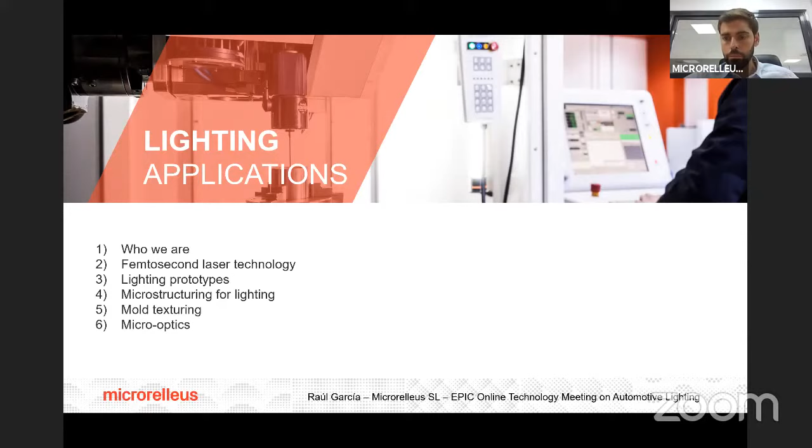I will speak just 1 minute about who we are and the femtosecond laser technology, then about lighting prototypes and mold microstructuring and texturing. That's our company, that's who we are. We are a service provider for industry. What we do is laser micromilling, microstructuring, laser texturing, and industrial engraving. The company was created in 1983. We have several different services and technologies. Our facilities are in Barcelona, and in 2016 we were pioneers offering femtosecond laser service in 5 axes.

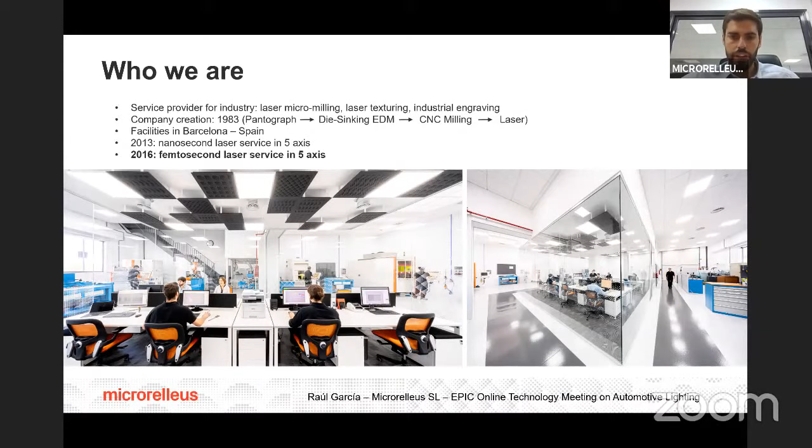So what is a femtosecond laser? A femtosecond laser is an ultra-short pulse duration laser, so the pulses of the laser are very, very short. In terms of the industry, which benefits and advantages do we have because of this short pulse? On one hand, we can engrave over any material - PMMA, PC, glass, steel, aluminum, whatever - and we can do it absolutely burr-free with good superficial quality.

If we compare this technology against conventional technologies like milling machine, die-sinking EDM, and so on, we can achieve smaller details than ever before. And if we compare it with nanotechnology processes, we can do it in an absolutely industrial way - big parts, quite big inserts with weight and so on, 3D shape as well.

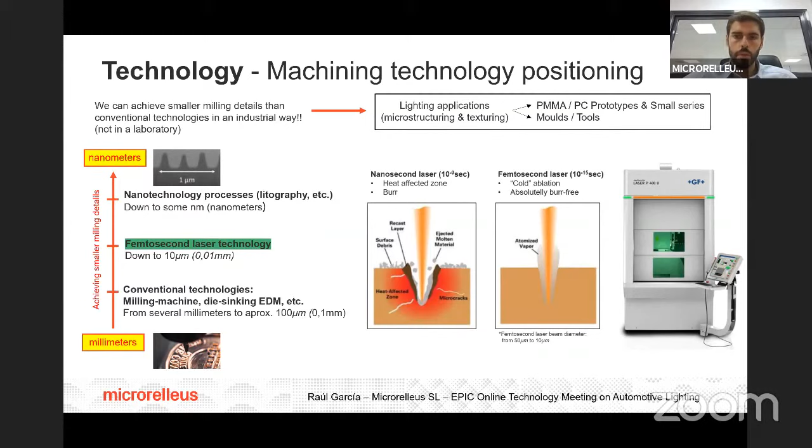So for lighting applications, what we do with the femtosecond laser - we work on PMMA or PC prototypes, also small series, and mold and tool. Beginning with prototypes, we can see in this image the blinker of the mirror of the new Seat Leon that was presented a few weeks ago. In this case, we created this microstructure for design purposes in the PMMA prototype at the beginning and then later in the mold.

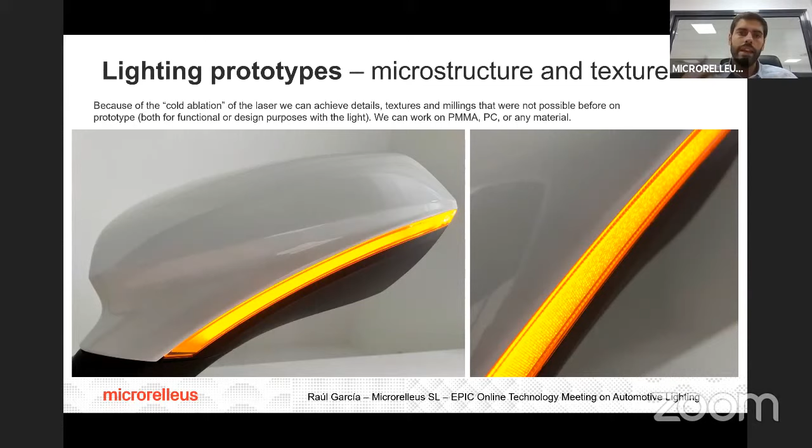We can see here the difference between the plastic injected part in the mold against the previous micro-milled part using the femtosecond laser over PMMA, and we can see that the microstructure is the same - the original prototype and the final mold.

We don't use femtosecond just for design purposes, but we can also imitate in prototypes the graining that is so important in automotive lighting, like K29, K31, the VDI scale, etc. In this image we can see that in Microrelleus we developed the imitation of those standard grainings in the PMMA prototype, showing the difference between VDI engraved on mold, the injected part, against VDI directly engraved over PMMA.

Usually customers send us the PMMA block already milled and polished, and we work over it for different parts of the car.

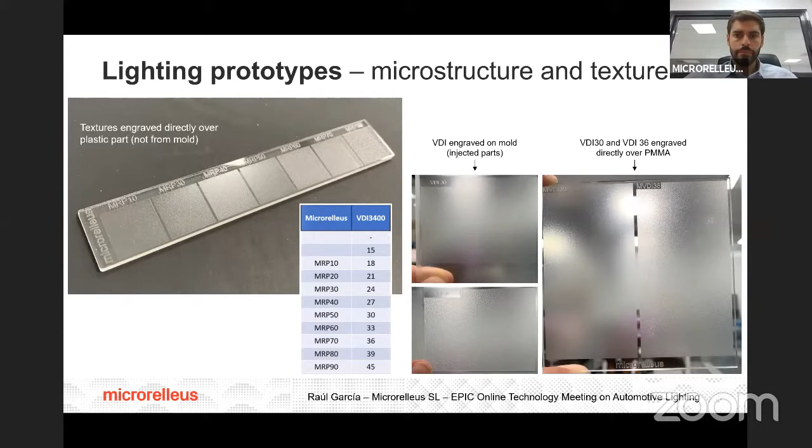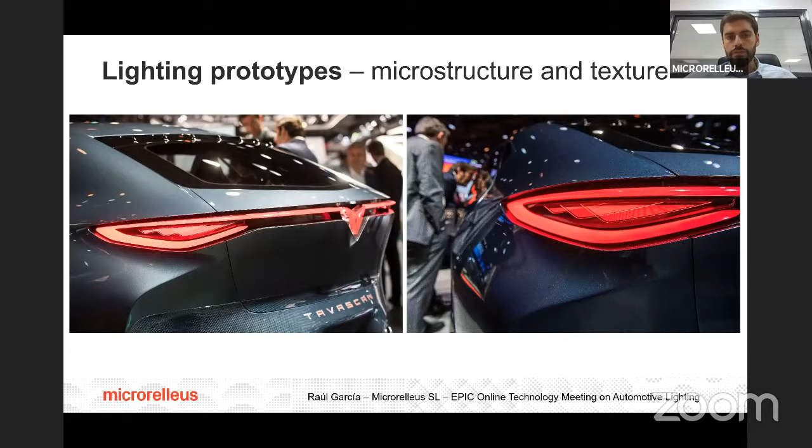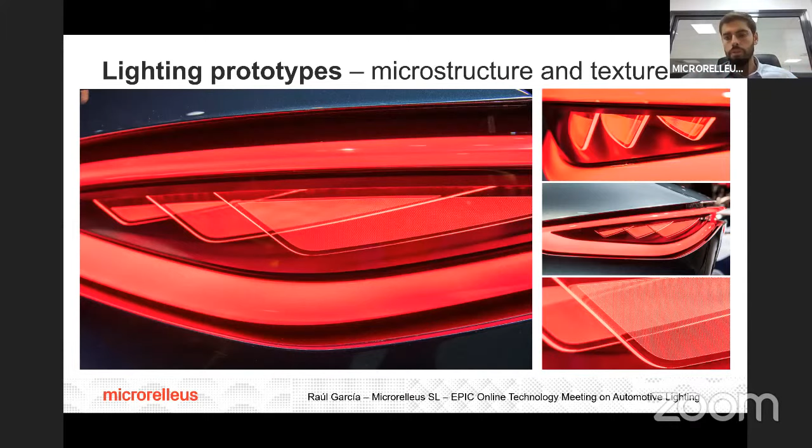To finish with prototypes, we engraved in this Cupra Tavascan prototype the microstructuring of three parts of the tail lamp. Those are microstructures for light curtains. LEDs are placed on top, and thanks to this microstructuring we can see the texture clearly, and the light is absolutely homogeneous on all sides.

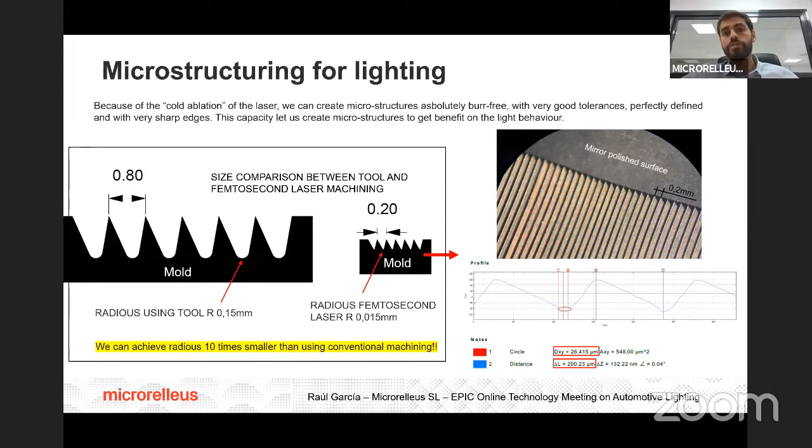If we speak now about mold and inserts, as we said before, we can achieve details much smaller than using conventional technologies. So for optical designers and engineers, there is no limitation anymore like the typical radius limitation of 0.15, 0.2, etc.

We can achieve a radius 10 times smaller than using conventional machining. We can see the example in an insert on the right-hand side, and the same example placed in a 3D insert.

So who creates these microstructurings for different purposes, like opening light, increasing light intensity, or changing light direction? Usually it's our customers, the OEMs, tier 1, tier 2, who send us the design of the microstructuring, but sometimes they ask us to be proactive in terms of design.

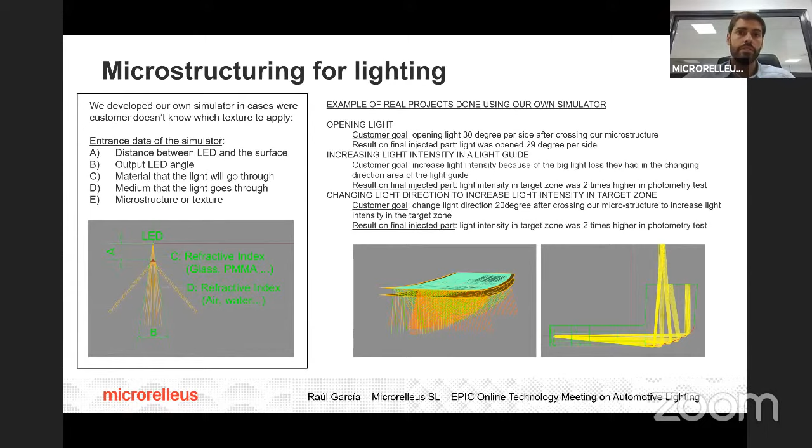We have our own simulator, our own ray tracer that we created ourselves with an algorithm generator, so we can also give this service, with some limitations, but we can offer it as well.

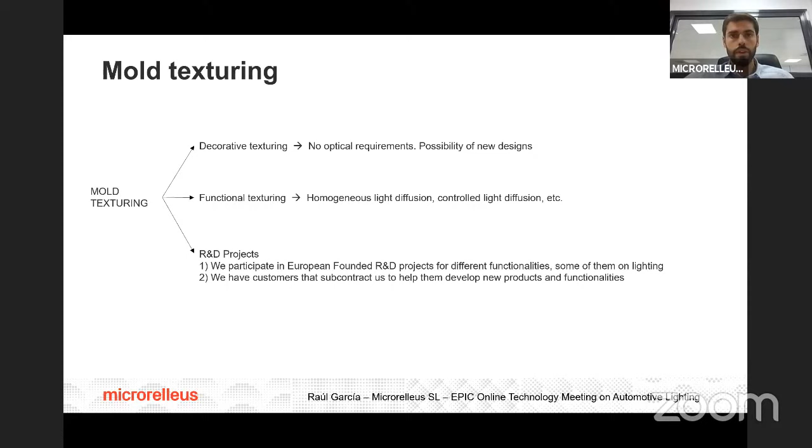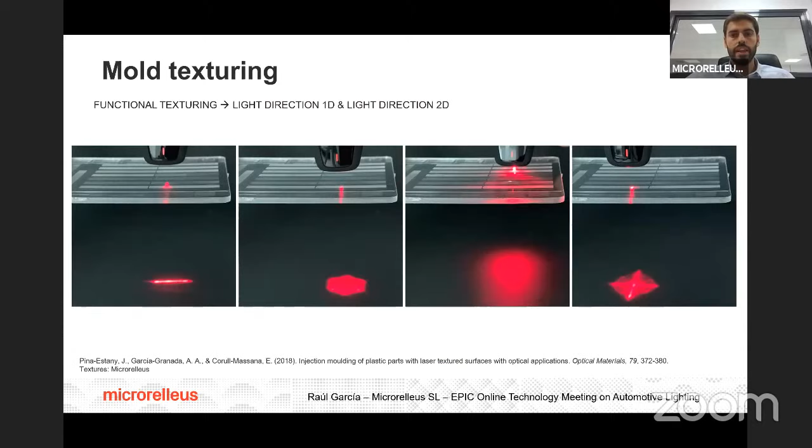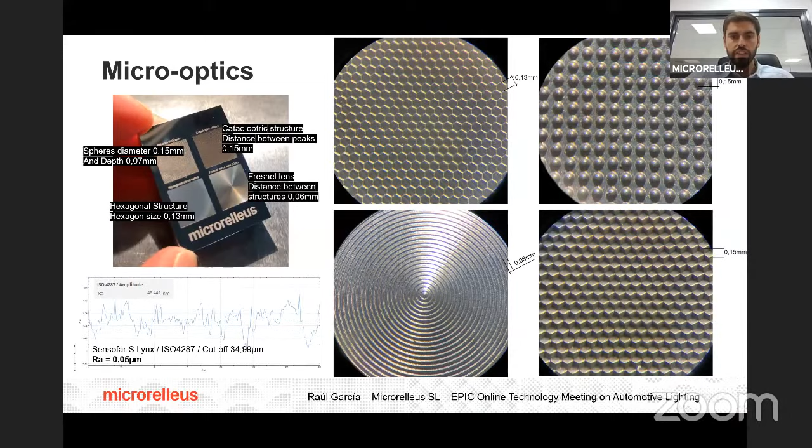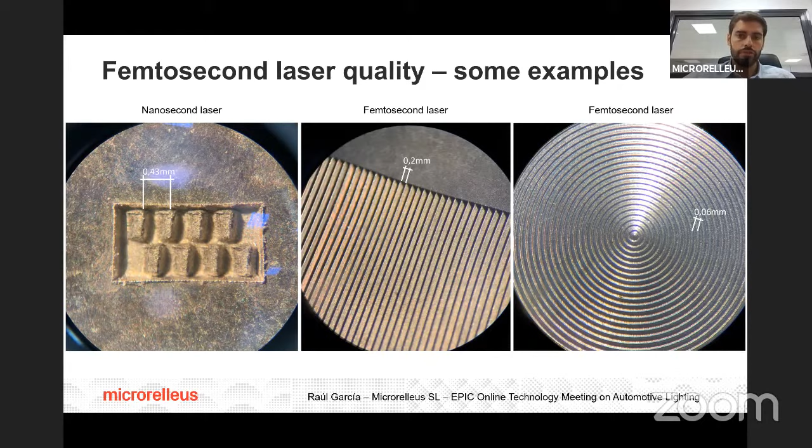In terms of MicroOptics, we achieve the highest quality and smallest details, as shown in this comparison against nanosecond laser. We can see much smaller structures without any burr, very good definition and surface quality compared to it, and the shape is also very well defined with much smaller radius compared to this nanosecond laser, which is the standard in the market that most companies use.

To finish, we offer services of laser microstructuring, texturing, and industrial engraving over final parts or single parts of serial production in PMMA or PC, applied also over mold and tool. We also offer R&D, and many customers pay us for R&D as well.

And our customers, who are they? They are OEMs, tier 1, tier 2, final product manufacturers, mold makers, etc.

So that was everything. I did my best to fit it into these 6 minutes. If you have any questions, please feel free to ask whatever you want.

Thank you very much, Raúl. I always like to start with Raúl because he always keeps the presentation on time, and it always feels very lively because your work is frankly exceptional.

But you are already quite an expert in these meetings, so you know what they are about: collaborations. If you could get the perfect collaboration out of this meeting, what would it be? What is the perfect question you would like to get from the car makers in the room today?

Well, finally, what we are looking for are OEMs or tier 1, tier 2 companies that, looking at our presentation, can sometimes open their eyes a bit and put their technology in our hands, so they can know about new possibilities and new developments and designs, able to apply to their previous developments or new ones.

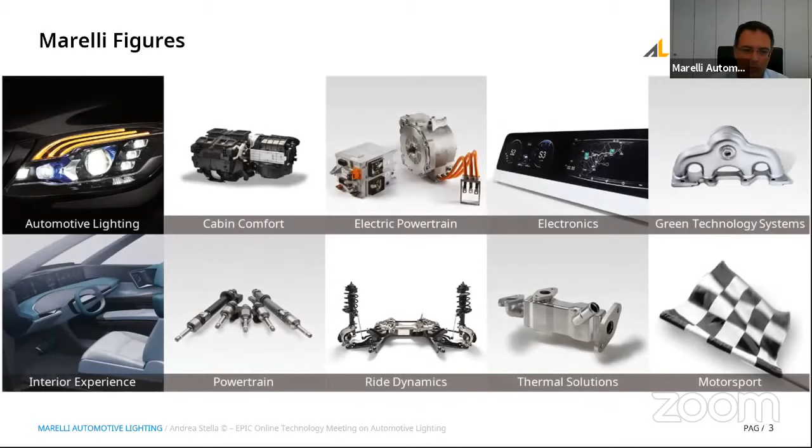This is our portfolio of products, of which automotive lighting is one of the biggest business lines. We are a truly global company with a footprint covering all the continents. Marelli, the whole group, has 13.4 billion euros of turnover, 170 locations worldwide, and over 60,000 employees.

Marelli Automotive Lighting takes the second position in terms of rear lighting supplier and third position in terms of front lighting supplier in the whole automotive exterior market, with 3.6 billion euros turnover, 31 locations, and more than 20,000 employees, of which about 2,000 are in the R&D group in my team.

Our product portfolio is pretty wide. We go from headlamps, rear lamps, lighting electronics, and also sensors. In the headlamp area, we cover the full spread of technologies, from halogen to our latest and greatest digital light, which we'll speak about shortly, with more than 1 million pixels to shape our light distribution and generate communication through projection on the road.

Together with laser and traditional LED -- we say traditional because LED, for the last 12 years, is standard technology for exterior lighting. In the rear lamp area, we also cover the full spread of technology, from full LED rear lamps to OLED rear lamps. Here in the rear, the keyword is homogeneity, style, and design, together with function of course, but it plays a much bigger role in the styling of the vehicle.

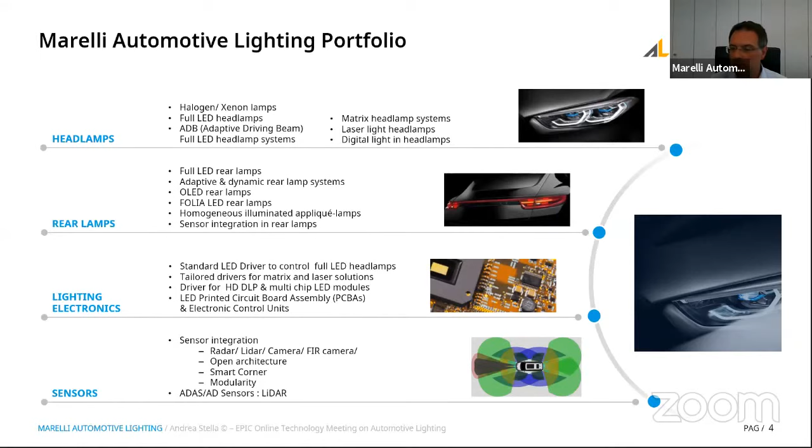And last but not least, we are also active in the sensor area for driving assistance and autonomous driving, where we have a joint development agreement with the company XenomatiX in the LiDAR area.

What is important for me to convey today is that all these innovations in the automotive lighting field are not possible with the set maker standalone. They need a strong partnership in both directions: first with our customers, because our devices are more and more connected with the rest of the system and need strong collaboration and co-development with them, but also with many of our tier 2 suppliers, because technologies like LEDs at the beginning of the 2000s, and laser, and then digital light processing, are only possible for us if we have the right partners in the tier 2 area.

So here we have some examples of what our history has seen, and it is part of our history being the first in the market with the most innovative technologies. We go from 2008 with the first full LED headlamp in partnership with Audi and Philips Lumileds.

We like to say we were the first. There's another one who also claims to be first. But with Audi and OSRAM, we claim to be the first in converting laser light into front lighting, and we were definitely first in 2018 with the first micro mirror headlamp with 1.3 million pixels in the Maybach S-Class, immediately followed by the Audi e-tron, where similar technology is also applied.

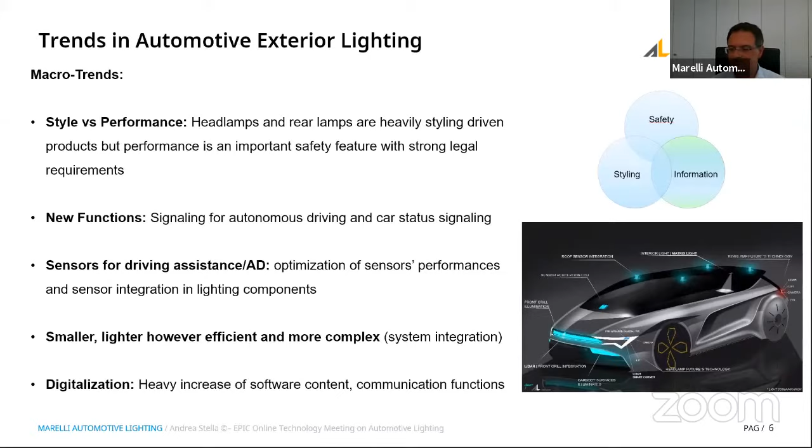Yeah. Go ahead, Anka.

Please unmute. Sorry, yes, I have a question about the digitalization, because you mentioned some digital light in the headlamps. Do you mean that you put the intelligence inside the headlamps, or do you have some intelligence in other places in the car, or outside the car? How do you deal with the intelligence in the car?

The intelligence is distributed, and it also depends on the car maker's platform strategy for the vehicle. But definitely the headlamp itself cannot fulfill all the functions. It needs information coming from other sensors, navigation systems, or body control units needed to generate the light distribution on the road. So depending on the car architecture and system strategy, we have developed systems where we have heavy content of intelligence in terms of real-time rendering for light distributions in the headlamps. We've done this, but in other applications with similar technologies, we have just received pre-processed information from the vehicle architecture. So this is very car-architecture-dependent, because these systems are much more deeply integrated with the whole vehicle system.

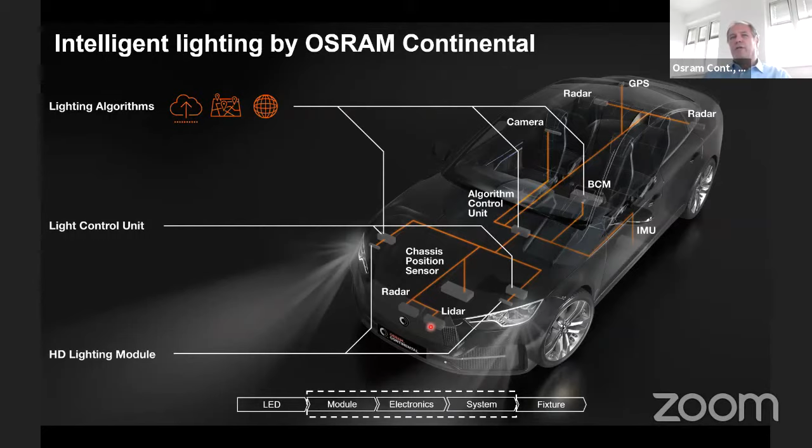Our customers are typically car makers and headlamp and rear lamp manufacturers. And that we do specifically for certain application areas, for front lighting, but as well for projection around the car, and also interior lighting.

Now to speak a little bit about technology: in front lighting, of course, besides more state-of-the-art materials and technologies we use to generate high beam, low beam lighting, or lower resolution driving beams, we are in particular interested and use two major technologies which are able to generate high resolution lighting. By that, being able to mask oncoming or preceding traffic, and even generating lines, patterns, or symbols, as was already shown by Andrea in the presentation before.

These two basic technologies are, on one side, digital mirror devices, which are lit by LEDs, and these are able to make light distributions of about up to 1 million pixels, and that's also the resolution. And as well, we use active matrix micromatrix LEDs, which light by themselves and do pixel resolutions up to several 10,000s. These two technologies are somehow competing, but also able to be used for different use cases. This is something we are really working on and are interested in further progress.

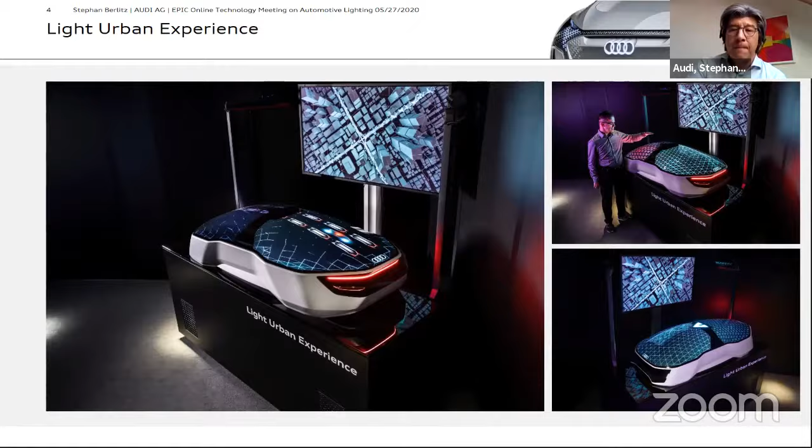Thank you. Thank you so much, Stephan, for this futuristic car. It looks like a dream car, super beautiful.

So you know how it goes with EPIC - you tell us what you can do, and you leave room to hear what the others can do for you. What kind of collaborations are you looking for? What kind of partners are you looking for?

Actually, it's altogether - the first thing is of course to show everybody what could be the future direction. That's one point, that's the main reason why I'm here. And of course I need a lot of partners, because this is a complete system.

You need electronics, you need lighting, you need even some old-fashioned characteristical hardware like windows. So it's not just lighting or electronics, you also need a new production of glass, for example. And it's about seeing who is working in this field, what different ideas we could get, and working together to see what could be the first steps to get micro LEDs, micro optics, new electronics, flexible electronics, and all of these things.

It's something that we will need, and also of course the electronic control units for all of this, because it's a difference if you turn on one LED, five LEDs, or a few thousand, or even maybe one day a few million LEDs.

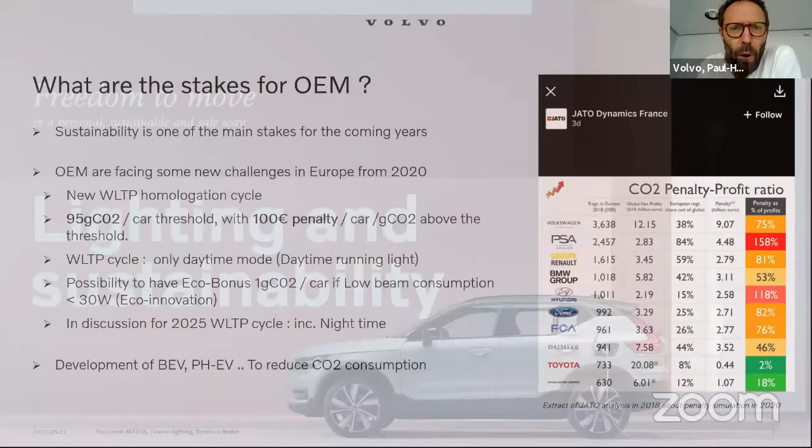So I will speak about lighting, and especially I will focus on sustainability, because I think we have to reduce pollution. I could speak about plastic and so on, but I will try to focus on consumption, because consumption for European car makers is a key issue, especially this year, because we have a new regulation in Europe.

Perhaps you are not aware of it, but you will see what I put in the presentation. We have a new regulation and a new homologation cycle for all the car makers. In this new homologation cycle, we have to respect a threshold, and this threshold was defined as 95 grams CO2 per car.

If we are above this threshold, we will have to pay a penalty of 100 euros per car and per gram CO2. On the right, I put a schematic - an analysis from JATO company in 2018 about the penalty that car makers might pay in 2020. You can see that it can be a huge penalty.

Due to that, the car makers try to do something, and especially they will develop electrical vehicles or hybrid electrical vehicles to reduce power consumption and then be able to respect this threshold.

But when we see this cycle, what is the relation with lighting? In this homologation cycle, the lighting is on, especially the daytime running light. The daytime running light is what we use to do the signature of the car with our beautiful signature. Also, because it's only homologation in daytime, car makers can have a bonus, what we call an eco-innovation, if the low beam consumption is below 30 watts, something like this.

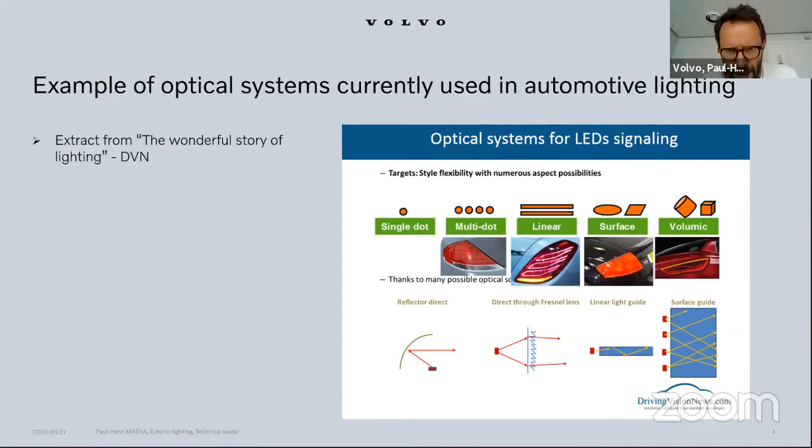If we see what we use for optical concept, I put a slide from Driving Vision News where you see the optical concepts we use in the automotive industry. You can see that it is a very old technical concept - we have reflector design, light guide design, and so on - and this efficiency is quite low.

If you remember the previous slide, the threshold is 95 grams CO2, that is to say lighting is around 1% of the total consumption of the car in the homologation cycle. So it is important. Also, if you compare to battery, you could say I have battery, I don't care about power consumption - but no, you take care also, because if you have a battery with a hybrid vehicle, it will be 0.5% of the autonomy of the battery, for example.

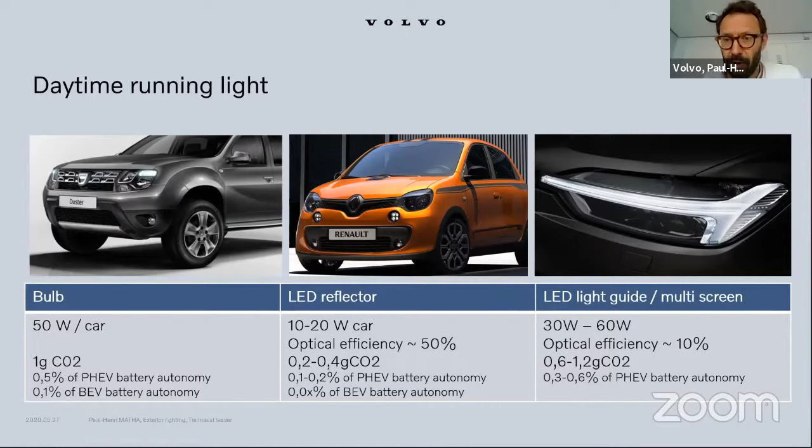What we call light guide or edge light technology. In this solution, the power consumption is quite important, and sometimes it is more important than bulb. So even if we have LEDs, we have power consumption bigger than bulb, and it is very important for the consumption of the total car and the autonomy of the battery.

If I continue, I put an example on the low beam. Low beam is when you drive by night, you switch on the low beam. So if you see what we had with bulb in the past, it was 150 watts per car. That is to say it is 3 grams CO2, and it could be, if you have a hybrid car, 1.5% of the autonomy of the battery.

If you use an LED solution, you have different optical concepts and different performance. I put a medium car like Renault Captur, for example, or it could be Volkswagen Polo. You can see that the optical system is an LED reflector. In this case, optical efficiency is quite good, 50% we can say, and the power consumption will be good.

But if you begin to reduce the size of the function and you want to have also very good lighting performance, in this case the power consumption will increase a lot. So you can see a Volvo solution, for example, where the height of the function is between 20 and 40 millimeters. Optical efficiency is quite low, between 20 and 30%, and then the power consumption is important, so it could be around 2 grams CO2.

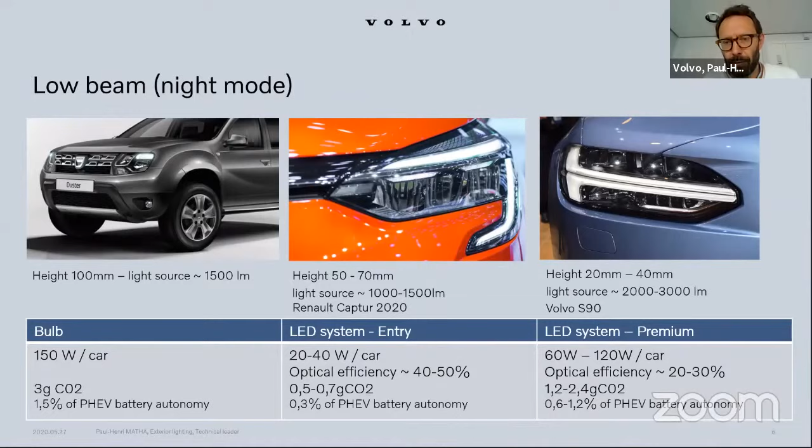That is to say that when we speak about power consumption, autonomy of the battery, and the penalty we will have in Europe in 2020, lighting is impacted.

So about the photonic community, we have to develop new technical solutions. You can contact us if you have some good ideas to have a very slim lamp, a very efficient optical solution, and a very efficient electronic solution also to drive LED, to be able to reduce the consumption of the system and also to be able to avoid increasing the size of the battery.

So if you want to do this, you can contact us, you can contact all the car makers, and you can contact all the lighting suppliers like OSRAM Conti, like Marelli and Valeo, because they are aware of this technology, and we have to develop new optical concepts, because today what we use is not so new. It is old technology developed 10, 20 years ago.

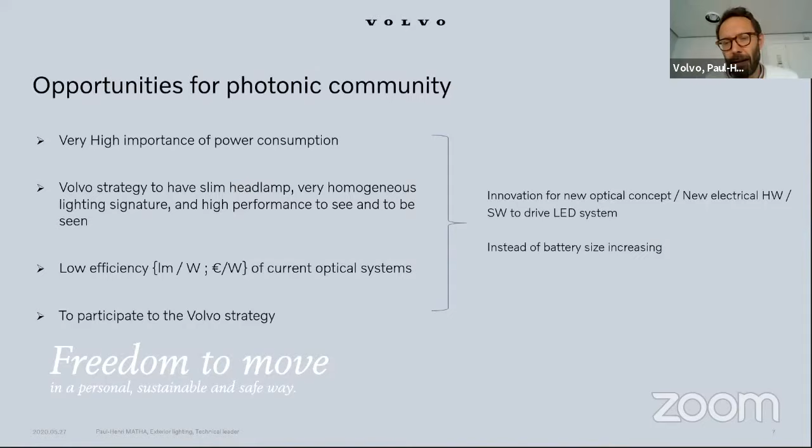I think it's really, really great that you told us that this was your challenge. We had a call with Paul like one week ago. He said, we can talk about LEDs, we can talk about optics, but really what concerns me is the power consumption, and I want to share that with the community.

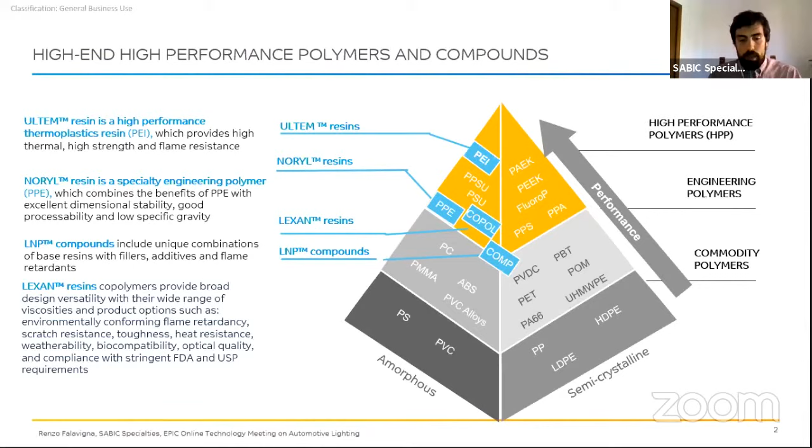The difference between the two technologies is that XHT is mainly non-transparent, opaque, while CXT is a fully transparent copolymer, natural color. This is what we can offer from the amorphous side.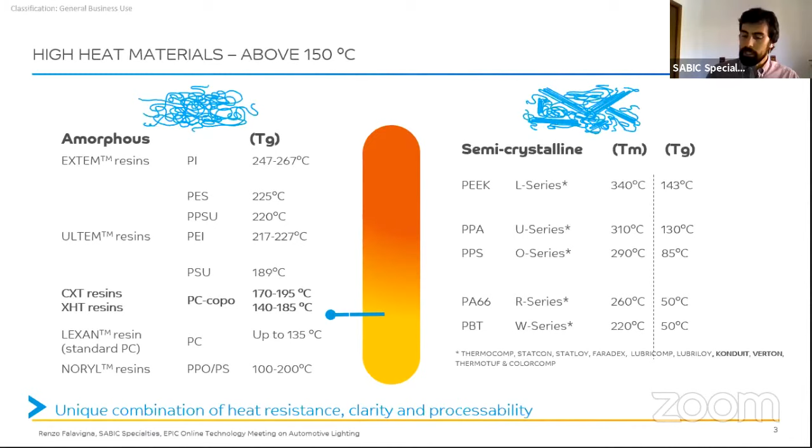From the semi-crystalline side, as I mentioned, we can produce tailor-made compounds based on all the resins available on the market. Let me mention just a couple. Our Verton family range - Verton compounds are long glass fiber reinforced compounds that can be used, for example, for mounting brackets of LED lights in automotive. Especially long glass fiber compounds can be useful in case you want to reduce vibration, and in case you need high fatigue and high creep resistance.

As a summary, what we can do for you: we can provide you materials for the following applications. For lenses and light guides, we can provide Lexan CXT, transparent Lexan, or Lexan XHT, colorable. For bezels and reflectors, again, high temperature resins like Lexan XHT or Lexan CXT, and Ultem resin, which are really good in processability.

They can be metallized directly without any issue, and they have a very good haze onset according to the formulation. And then in the end, we have an LNP product line, so the compounds based on polymers ranging from polypropylene to high-end polymers like PEEK for interior application, specific application in lighting, like for example heat exchange. We can provide you thermal conductive plastics.

And what we are looking for issues - we are looking to hear you complaining, because we are not only providing materials, but we are also providing solutions. We are providing technical service, and we are providing simulation expertise, for example.

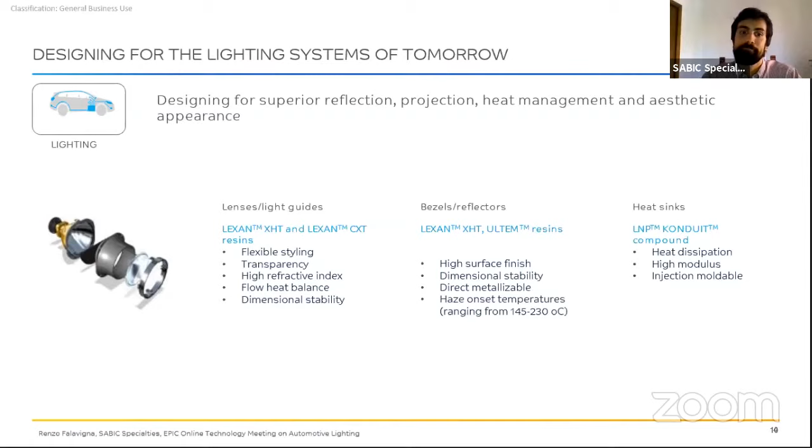And this is where I enjoy the meeting the most. This is when we heard from the end users and system integrators, and now we have the companies trying to solve the issues. So what I normally do is go back to the car makers and tier ones, and ask them what resonated with them in this presentation. So I'm going to go to Claus, because from Continental, we need to understand what are the issues with reliability, and can the material that SABIC is making for any harsh environment solve any of those issues? Claus.

Yeah, I mean, it's of course interesting to hear what's possible, and I think from the information we really need to look into details and see what we can use, right? I mean, it's of course too early to be specific here, yeah? But it's good to see also opportunities and how to deal with that.

But do you have any demands when it gets very hot? Imagine that we're in summer, every year is hotter in the world. Do we have any demands when the optics get very hot, and you can use the unique selling point of SABIC plastics?

Yeah, I mean, it's not so much summer and hot. I mean, it's even, as was mentioned today, miniaturization is a key topic for the future. Everything gets smaller - lenses, everything gets smaller. So temperature loading, also from LEDs and everything, because of the miniaturization, is getting more important. So there might be a possibility to use this high temperature.

Thank you, Jose. Let me share my screen. I think here it is. Can you hear me now? Yes, loud and clear. And we can see crystal clear too.

Hi to the EPIC community, and thank you, Sana and Jose, for giving me the floor for this couple of minutes. I already heard a lot of interesting challenges where we think we can serve the market with. My name is Hans Velten. I'm responsible for business development at IMS, a beautiful company in the Netherlands. What we do, first of all, is we are a machine builder and we design and build special machines for small and accurate products. This is our business, this is where we're very good at, and we can help the market with this.

Next to the core business of assembly lines, we have our own R&D department, which, as we heard already, is very important because there are a lot of new technologies which we can help the market, our customers, with our own R&D for their assembly challenges.

To give you an idea about the company, we are located here at the red dot in the Netherlands, and this is the highest place in the Netherlands. So if we have a problem with our dikes, we are still safe here in this area. We have some 120 to 140 people working at our company, and our sales are growing. Last year, it was between 40 and 50 million euros. On the right, you can see the automotive industry where we deliver our production lines to, worldwide, from the small country of the Netherlands.

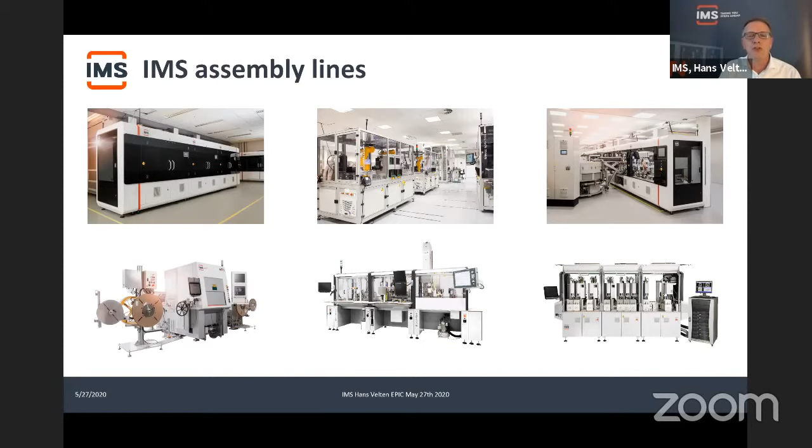So what do we put in all these nice high-tech machines? There's a lot of processes, of course, and I'm not going through all of this, but what is most important, and where we can help this challenging market of automotive lighting, is the highly accurate aligning of optics. It's all around high precision, and it gives an idea of what we are good at. We feel comfortable in the micron area, let's say between 0.5 and 50 microns. The accuracy of aligning is where we, as a machine builder, feel comfortable.

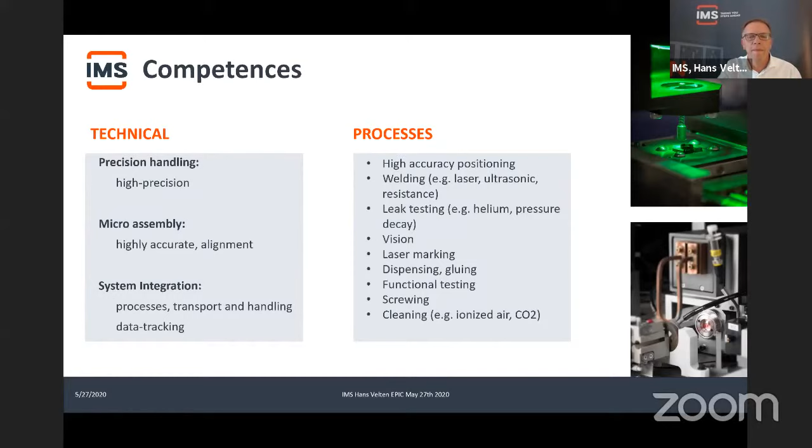So the markets we are working in are mainly three: medical, smart devices, and of course automotive. This is what I want to focus on in the last couple of slides, because there are some nice challenges. Some examples of products, I want to highlight this one. Ten years ago, we started with production lines for these small products. I hope you can see them. These are micro lenses for mobile phones. So your mobile phone is most probably equipped with a lens manufactured on our machines.

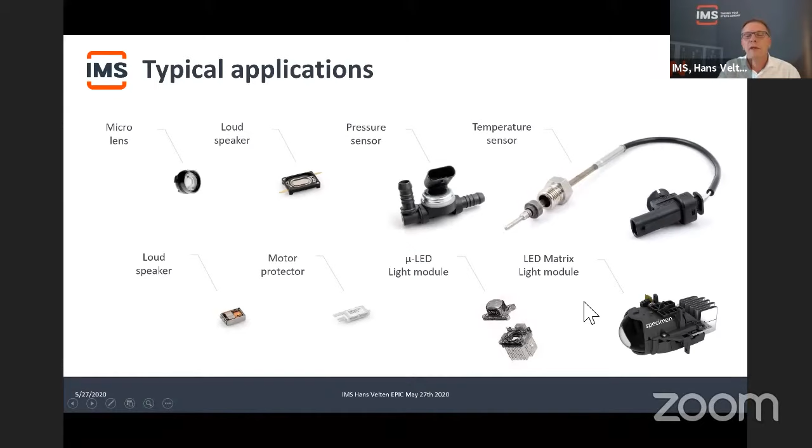And from there, we take the experience and transfer that to the automotive market, which you see here on the right, for the newest generation of light modules. This is a very interesting aspect. You see here some light modules, and you need, for this newest generation of light modules, new technology.

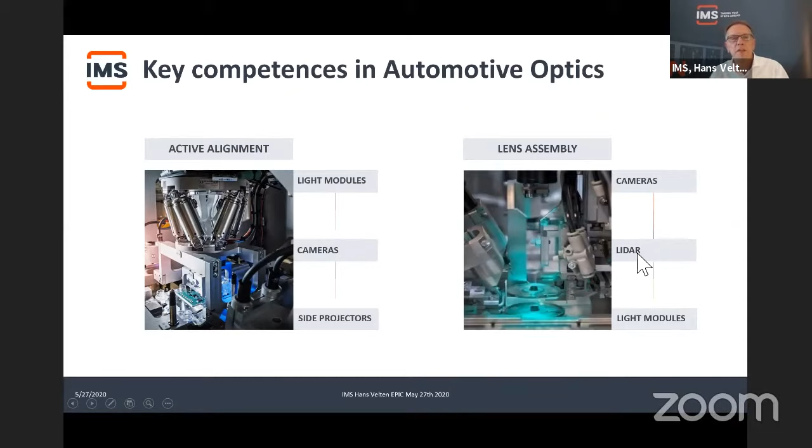In general, we split our activity in automotive into active aligning for three kinds of product groups, as well as the other activity within automotive, which is lens assembly. Lenses which are needed for cameras, for LiDAR, and for lighting. I'll leave aside this lens assembly; I want to focus on active aligning. Active aligning is really something interesting and new, because everybody's talking about new headlamps, rear lamps, HD lamps, micro LEDs, up to even 100,000 pixels I just heard, and DMD with the Texas Instruments technology.

But if you want to assemble these kind of products, you need a new technology, which is not commonly available up to now in the market of automotive lighting assembly. This is where we can offer great service to the market. The assembly is no longer a poka-yoke assembly, but we need a new technology in this market.

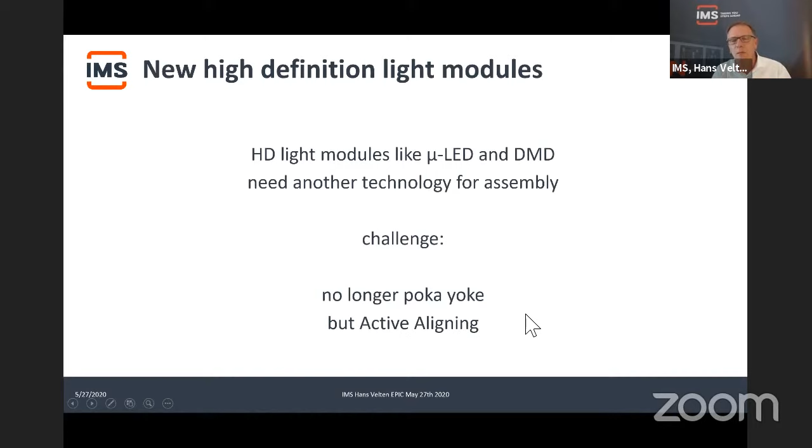The technology is called active aligning. To give you an example, here you see the newest generation of headlamps with a micro LED with up to 50,000 pixels on a heatsink, and you see the lens array. This is what Audi, Renault, Volvo, etc. want to apply in their car, but the quality of the projection on the road is also based on the aligning of the lens assembly to the micro LED.

This cannot be done with a poka-yoke, but we have to go to active aligning to make that possible. You see here schematically a heatsink with the micro LED and a lens array, and we, with, for example, hexapods, manipulate this towards the lens assembly, and in the meanwhile we look at the light which is shone onto a light interpretation box. Through an iterative process, we manipulate until we have reached the point where the image quality is optimal, and then we fix the glue with the UV curing.

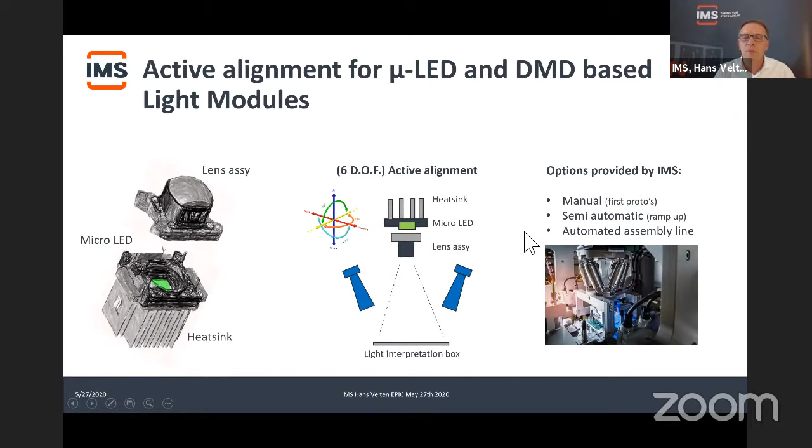For this we have developed a standard concept which we offer now to the market. We can go through manual or semi-automatic or even automated assembly based on this technology. So finally, what we can do, we can take you steps ahead in terms of technology and in terms of cost efficiency for your newest generation of light modules, camera assemblies, side projectors, and the lens assemblies belonging to them. This is my message, and I think we can serve this market very well with our competences. Thank you for listening and watching.

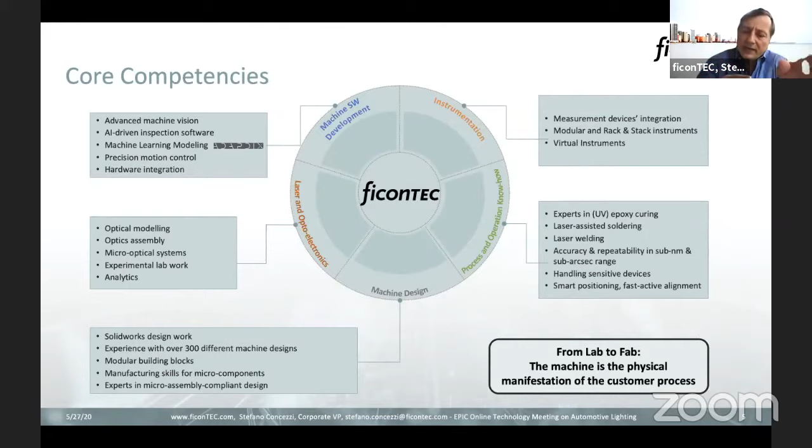I would like to talk a little about machine software development, where we use advanced machine vision, artificial intelligence driven inspection software, but mainly also machine learning modeling to provide a very high uptime. We will see in a second. And of course, we also work a lot with our tier 1 and OEM to start work on their project to build, to manufacture, to design, to manufacture. That is the complexity that the industry has.

If we look at the automotive industry critical metrics, the KPIs, we need to deliver very efficient total cost of manufacture, both from a CapEx and OpEx perspective, and for this reason the AI part is important. The manufacturing cycle time, the faster the better, delivering very high yield, so quality and speed of production that are often orthogonal to each other.

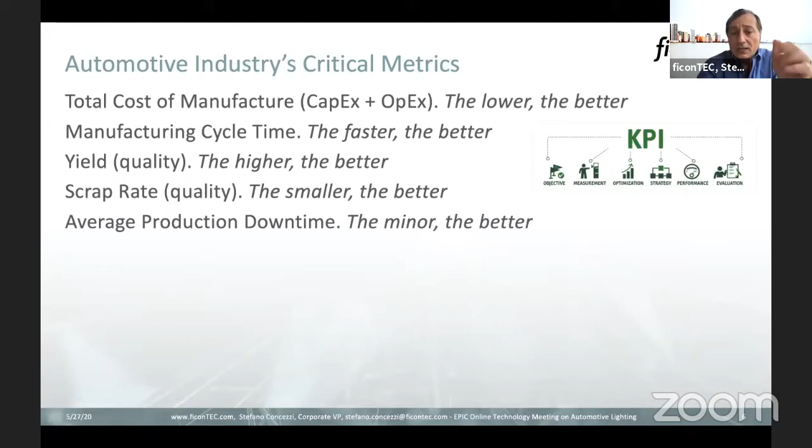Absolutely deliver a low scrap rate, and of course I already mentioned the APD that need to be very low. So if those are the KPIs for the automotive industry, we can address that because we can work with tier 1 or tier 2 in order to support the PPAP and APQP, and of course delivering very low TCM, fast cycle time, high yield, and so on. We have predictive maintenance and global service operation for that purpose.

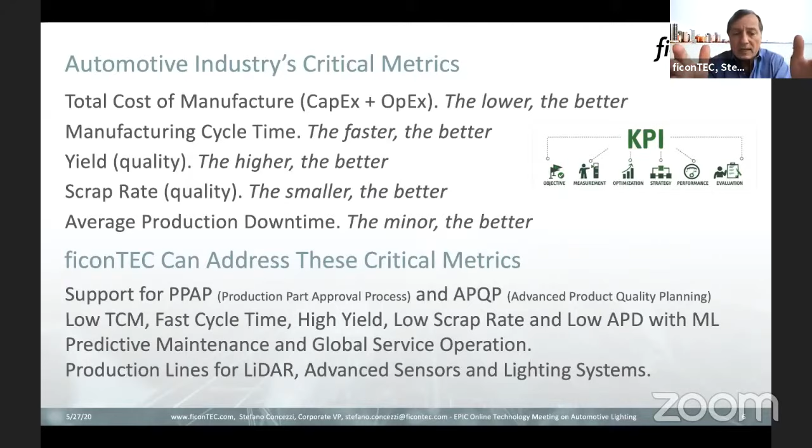Our focus are production lines for LiDAR, advanced sensor, and lighting. And the third, this is relevant, for instance, to avoid any kind of scrap rate down the stream. If you go up the stream, you need to have the capability to do wafer level test for automotive lighting components, typically VCSEL, LED, micro LED, whatever is the active part. In that case, it's purely optical measurements that we are going to do, and again, on the top right, you see the video that we prepared for a demo for a partner.

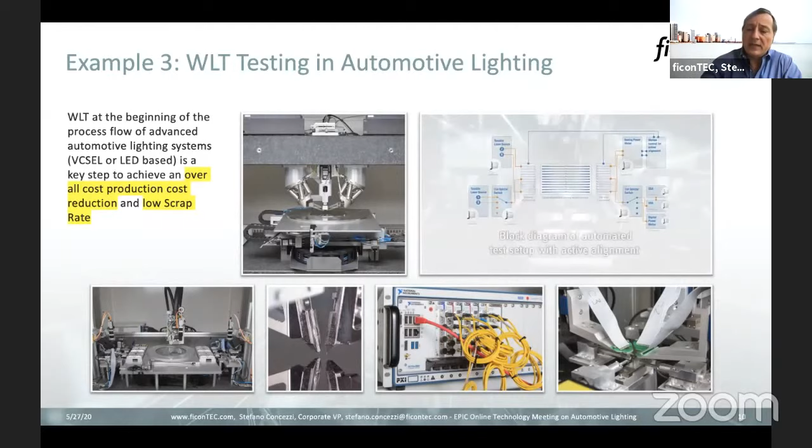What I also want to emphasize is the expertise of the company and of our partners to work with modular instrumentation. In this case, we have PXIe from National Instruments and Coherent Solutions for the optical measurement, which allows us to do very high parallel counting and measurement that performs a very fast WLT in this specific case. So bottom line, if the KPIs are the ones I already mentioned, we can address those, and we work with tier 1, tier 2, often also OEMs, with their R&D to facilitate the design to manufacture of their lighting system. Thank you for your time.

And if you have any question, of course, I'm here, as well as the rest of the company.

ficonTEC is one of the success stories that we have in EPIC. Thank you so much for a great presentation. If you ever had the chance to go to Achim and see in real time how these machines operate, you will be amazed. One of the things I'm quite surprised with, Stefano, regarding the ficonTEC technology, is how active alignment is being considered as the key solution in volume production.

What is the pull that you're seeing from the automotive market on active alignment of optics and photonics? It's a good question. The point is the quality, or if you want the precision, of the device that you need to come out. Mainly it's relevant for lighting, but for instance for LiDAR, in automotive in general, the alignment of the active device with the lens and the rest of the system is critical. So one of our differentiations is that we use active alignment for all our assembling. That's the main reason, and we can combine, as you mentioned, the quality with fast production cycles.

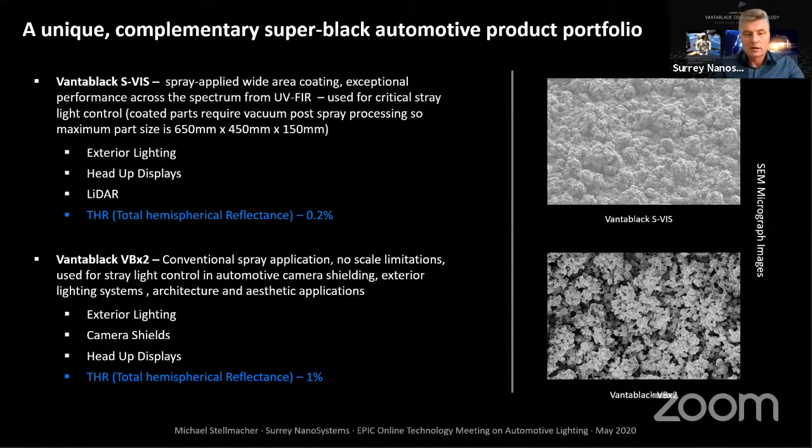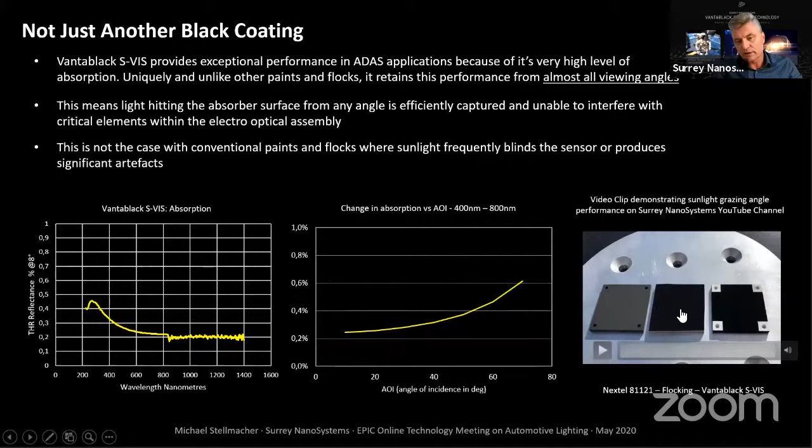The real performance of Vantablack is visible when considering the grazing angles. You can see in the middle diagram that there's almost no change when the angle is changing - we're still at 0.6% at 70 degrees incidence angle. You can see the comparison to the standard coating and to flocking in this very short clip. So when changing the viewing angle, the other coatings become gray, they're sparkling, and Vantablack just stays black.

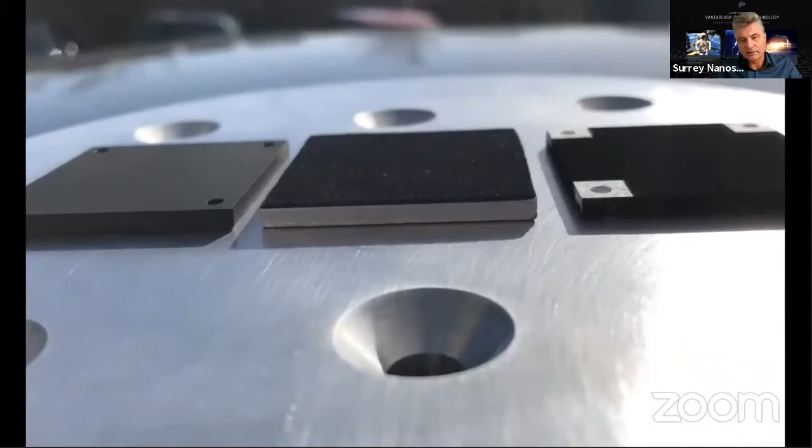So what can Vantablack contribute to automotive lighting? The modern LEDs provide a really massive amount of light, which is quite good because we can illuminate a lot of area in front of the vehicle. But on the other side, this light needs to be well controlled. Otherwise, we will get in trouble, for example, with regulation.

And we're immediately violating the ECE regulation. So what we have done, we simulated - we put Vantablack in the simulation on some of the faces of the shield, and the reflectances immediately disappeared. In this way, we brought the light beam back to the legal standard.

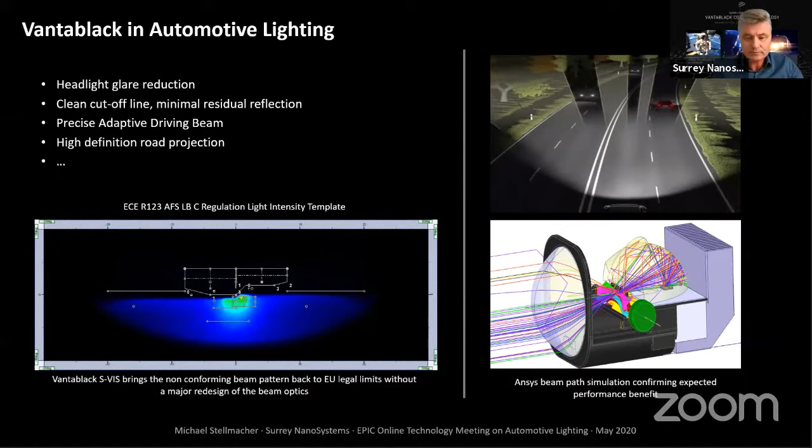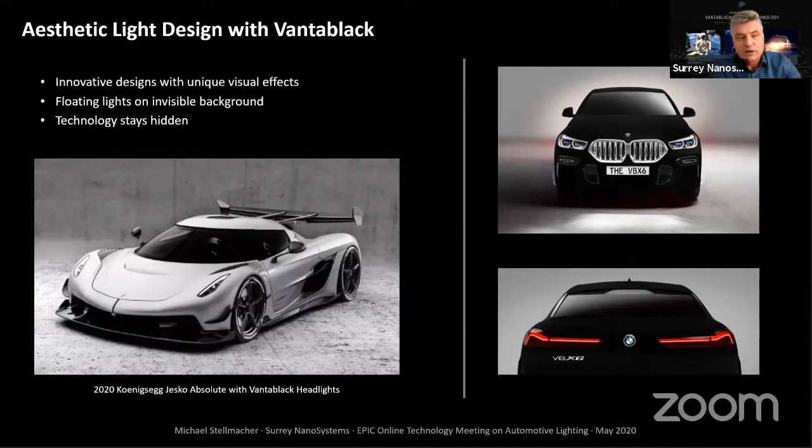I hope you enjoyed my presentation. If you have any questions, please...

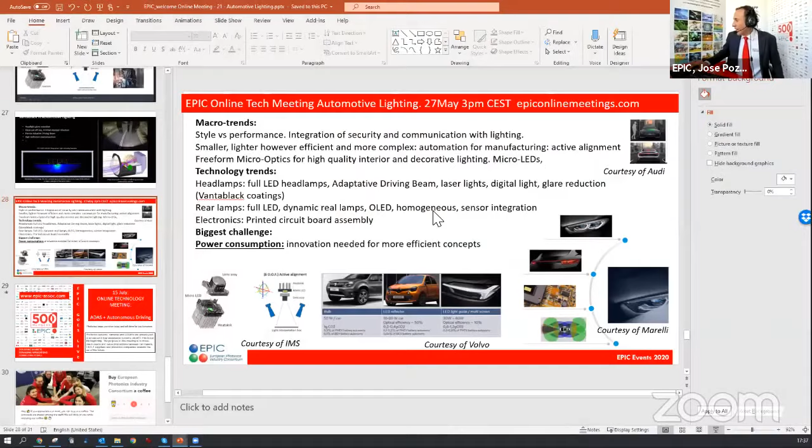I promised you the meeting would last 2 hours and a half, and it's already 2 hours and 35 minutes. I take your time very seriously. I did learn a lot about this meeting while chatting with all of you on WhatsApp and YouTube. I took notes and put together this slide in the last 5 minutes with my learning points. I see some macro trends.

There was a very good presentation from Marelli, talking about style versus performance. Also very interesting were the presentations from Renault, and especially from Volvo and OSRAM Continental, on the next stage: integration of security and communication with lighting, LiDAR and lighting together. That's something that's going to be on our minds for a long time.

I see 2 macro trends from the photonic side. First, micro-optics: free-form, high-quality, low-price plastic polymer. That was a key thing I understood from the needs of the different OEMs, especially the comments from Valeo. Also micro LEDs - that's a really big thing, and a continuing story. We're going to address it again on the 5th of June. There's a lot of talk about micro LEDs for this market.

On the technology side for automotive, full LED headlamps, as already said, 10 years in, there's still challenges to address, especially on packaging and assembly. We talk a lot about adaptive beam lighting from the OEMs, but not so much from the technology suppliers. So in the next meeting on this topic, and there will be more, I promise I'm going to bring companies who can do automated innovation on scanning technologies without moving elements. This is a big thing for EPIC.

Laser lights - I really want to have a roadmap on when, by when, which lasers, which wavelength, and which power, to make sure they put together the supply chain for this. Digital light was a concept brought together in a couple of the presentations, and glare reduction. On that, the Vantablack coatings are a unique selling point, and for me, on the technology side, also the best presentation today - congratulations, Surrey NanoSystems.

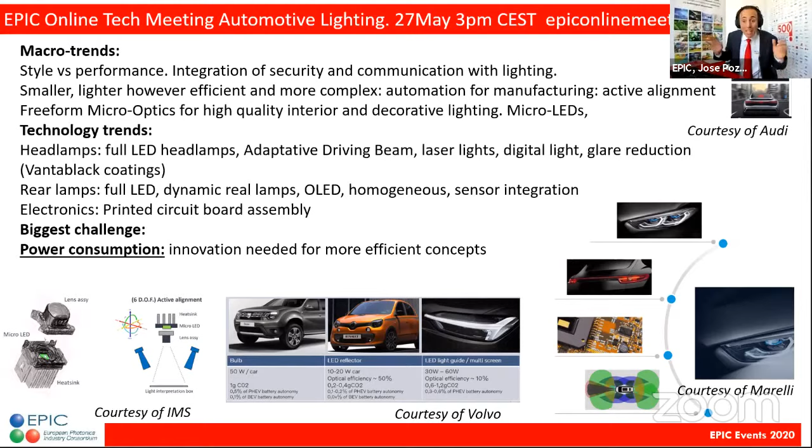A couple of things will stay in my mind for a long time, because today, in my opinion, we made history. Today we brought together the automotive industry and the photonics companies, and this is the beginning of a long tradition of cooperation. I'd like to say one more thing before we hang up.